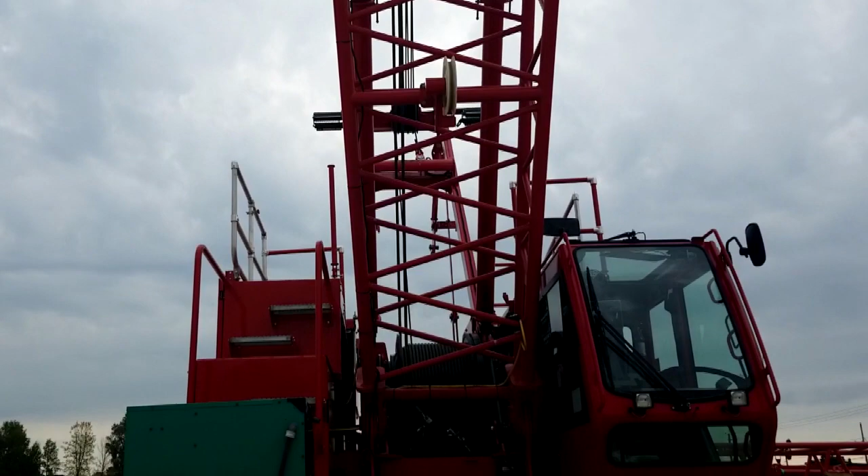To begin the inspection process of our MLC100-1, we must first reference the MLC100-1 Inspection and Maintenance Checklist, or F2317. Let's bring that up now.

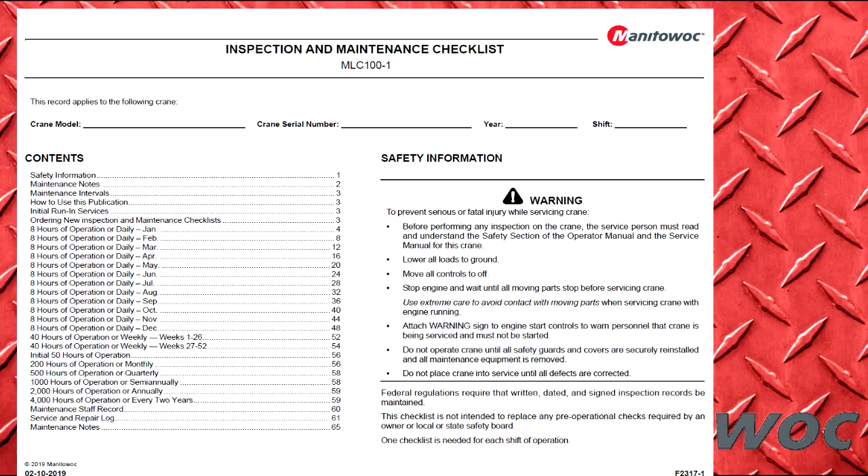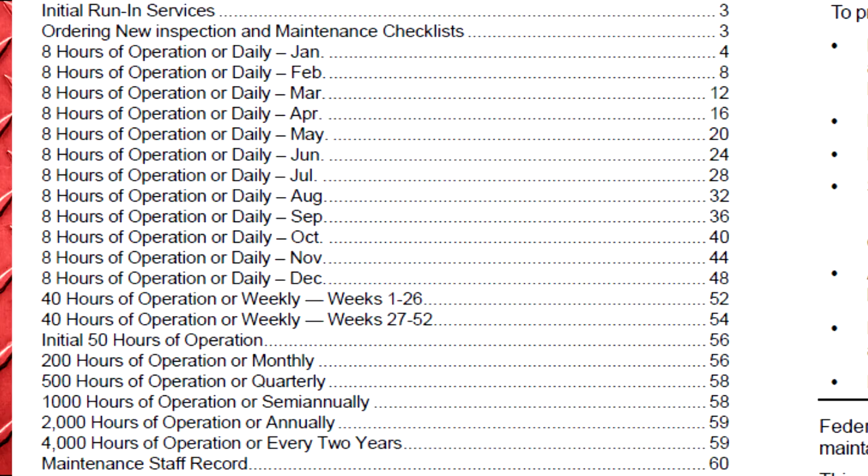This document outlines all of the expected maintenance procedures that must be completed every 8 hours or daily, 40 hours or weekly, after the initial 50 hours, 200 hours or monthly, 500 hours or quarterly, 1,000 hours or semi-annually, 2,000 hours or annually, and finally 4,000 hours or every 2 years.

This checklist is designed to be filled out by job site personnel working with the MLC100-1 so proper maintenance schedules can be tracked. But to begin the maintenance process, let us look further in the document to the sections detailing the 8 hours or daily maintenance steps, for this example.

We will assume we are doing a daily inspection on the MLC100-1 in May. Therefore, we must find the 8 hours inspection checklist for the month of May.

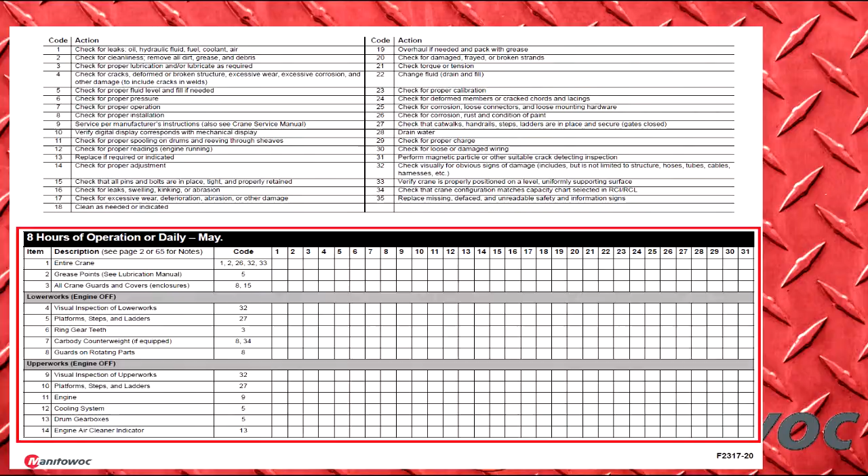While looking at the section detailing maintenance requirements, we find two tables: one of maintenance codes and the other for monthly tracking or scheduling. Each maintenance item is numbered in the leftmost column with a description of the item to be maintained or inspected, and maintenance-specific notes or codes are shown in the following columns. The remainder of the table is used to check off completion of the inspection every day for that specified month.

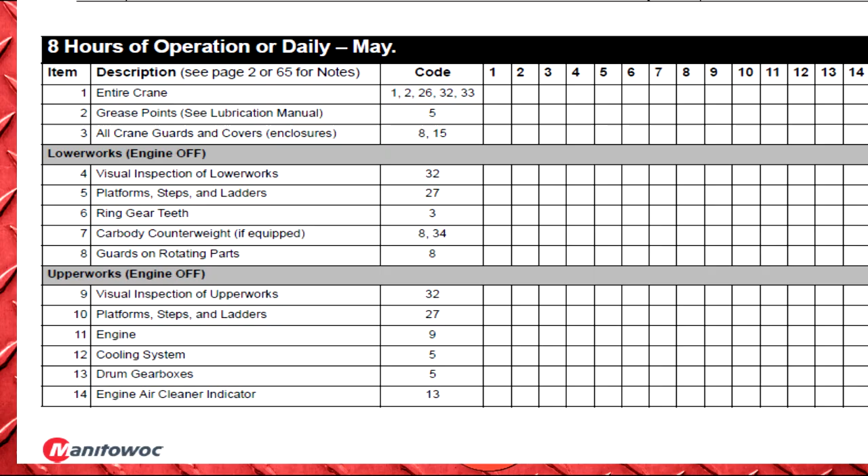To go through a few examples of using the inspection guide, we will look to the first item. It states that the entire crane must be inspected, and looking at the table above, it notes that codes 1, 2, 26, 32, and 33 must be checked.

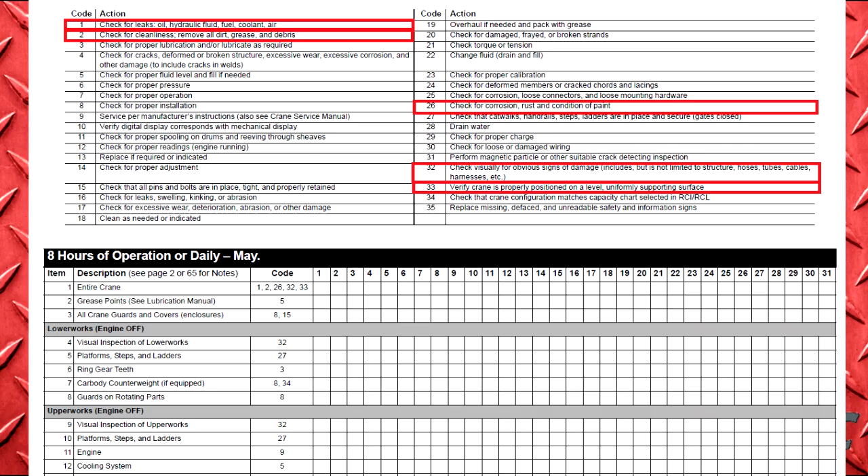That means we must check for oil, hydraulic fluid, fuel, coolant, or air leaks; remove all dirt, grease, and debris; check for corrosion, rust, or poor paint conditions; and inspect for obvious signs of damage to all items, including but not limited to structural components, hoses, tubes, cables, or electrical harnesses.

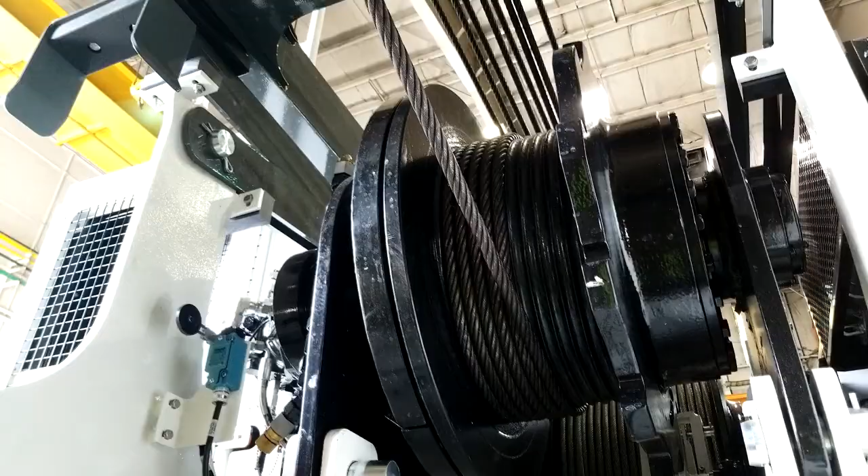Verify correct crane position, level, and supporting surfaces. Make sure to pay careful attention to any rust, corrosion, or damage on any wire or rope equipped on the machine. As shown under item 50, codes 3, 11, and 20 are present for inspection of the machine's wire rope. Therefore, cable must be checked for proper lubrication, proper spooling and reeving through sheaves, and damaged frays or broken strands should be addressed.

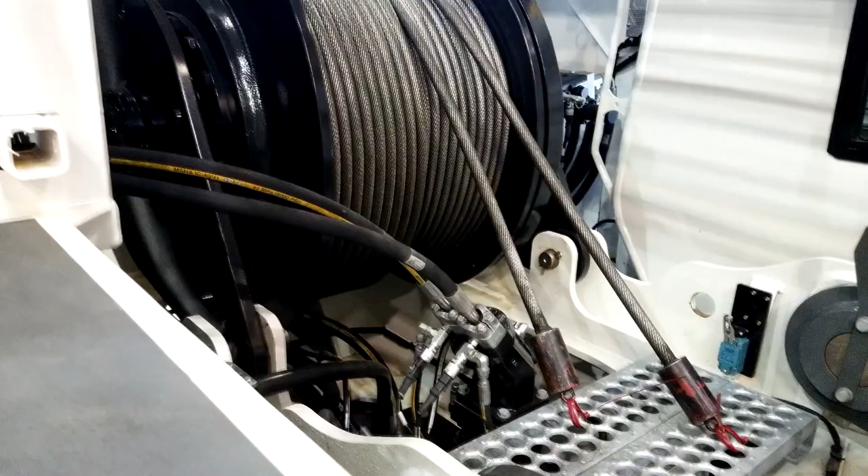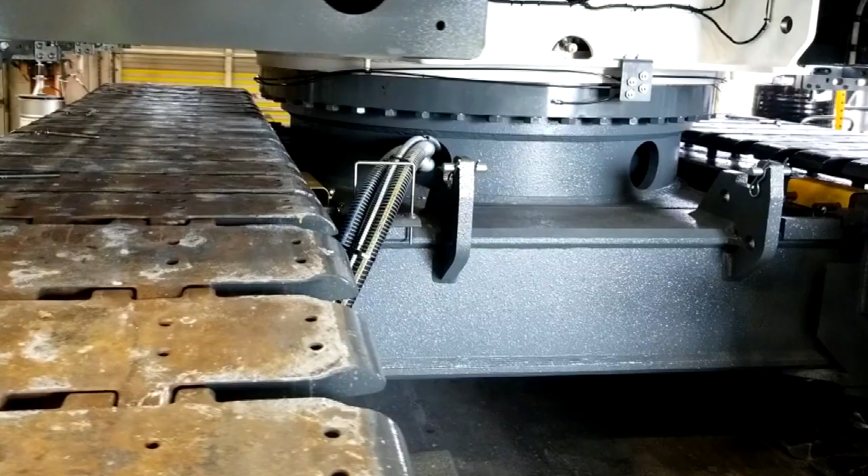Also pay attention to exposed hydraulic hoses, tubes, cables, electrical harnesses, or other structural components on the lower works, such as those used for the travel system. With these being exposed to the elements and or near to the ground, they must be checked daily for any signs of wear or unintended damage, as listed under item 4, code 32.

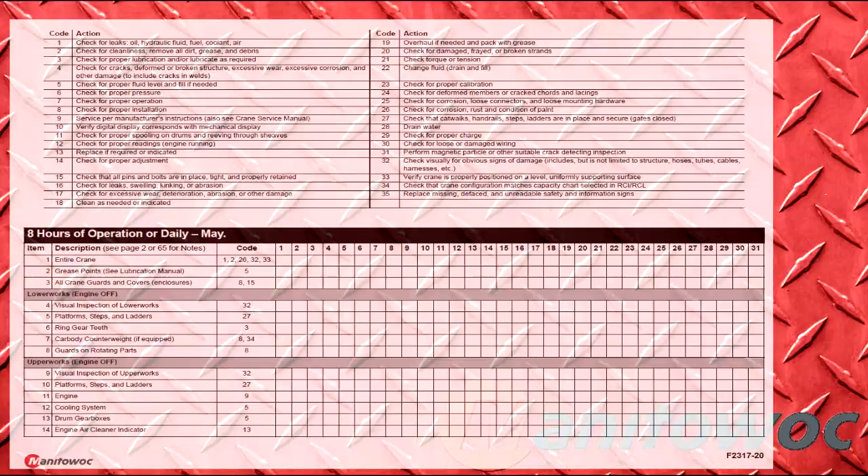Let us now look at a few additional inspection points. Looking lower on our checklist, we can see several items on our upper works must be inspected with the engine off. Firstly, item 10 notes that platforms, steps, and ladders must be checked for damage and ensure they are secure.

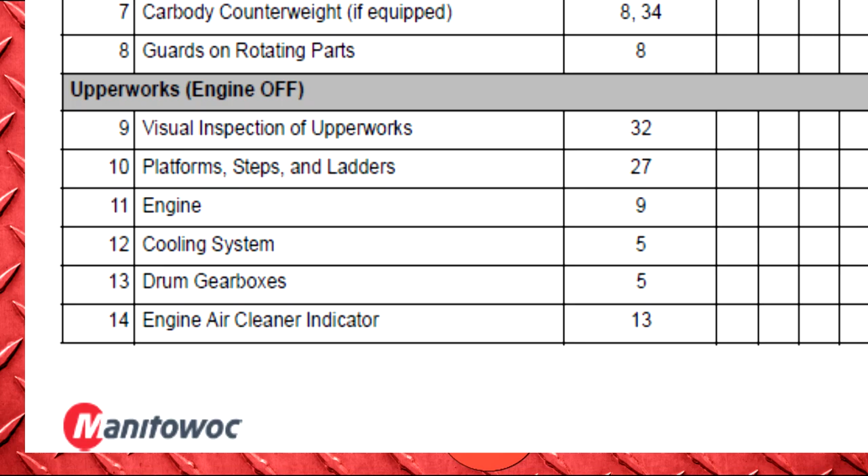This includes verifying all retaining pins are properly installed and all catwalks, railings, and ladders are not structurally damaged and have been fully deployed prior to operation of the MLC100-1.

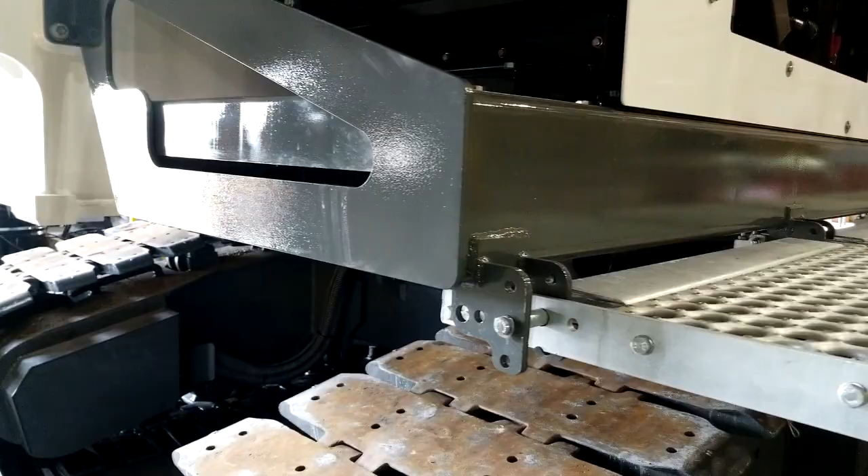Note: during crane assembly, deploy and secure rotating bed catwalks as needed to allow for safe ascending and descending of the machine. It will be easier to access the operator's cab if you leave the sliding platform stored under the front of the cab until after the crane is traveled off the trailer.

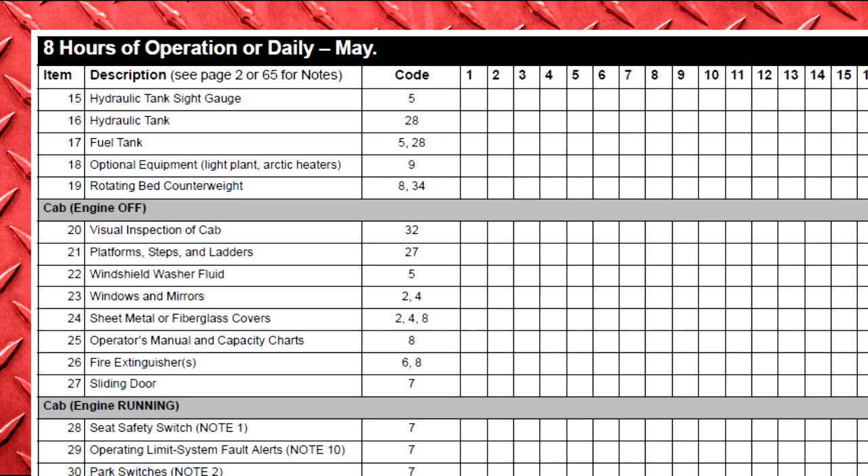Item 15 notes that the hydraulic sight gauge must be checked to ensure hydraulic oil is at an adequate level. Note: for more in-depth maintenance procedures and locations of all items referenced, the lubrication guide for the MLC100-1, or Folio 2314, is a great tool.

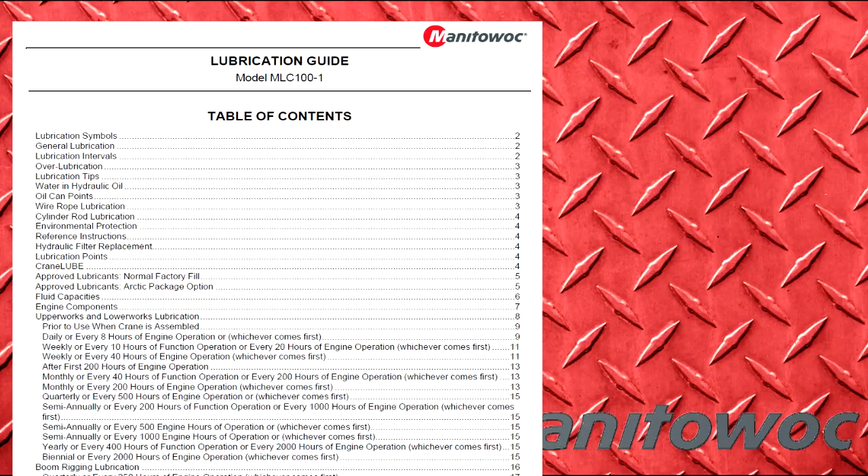If we look to the daily, or every 8 hours of engine operation, inspection points, we once again can find the points to check hydraulic oil level. This point is labeled as D4.

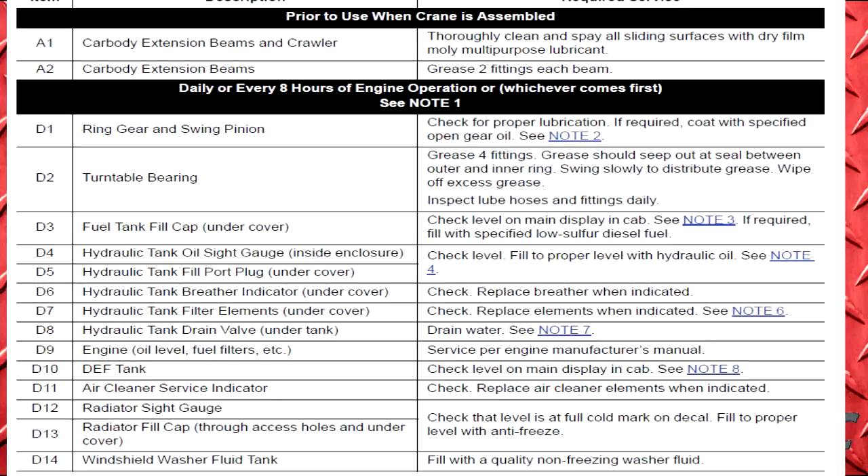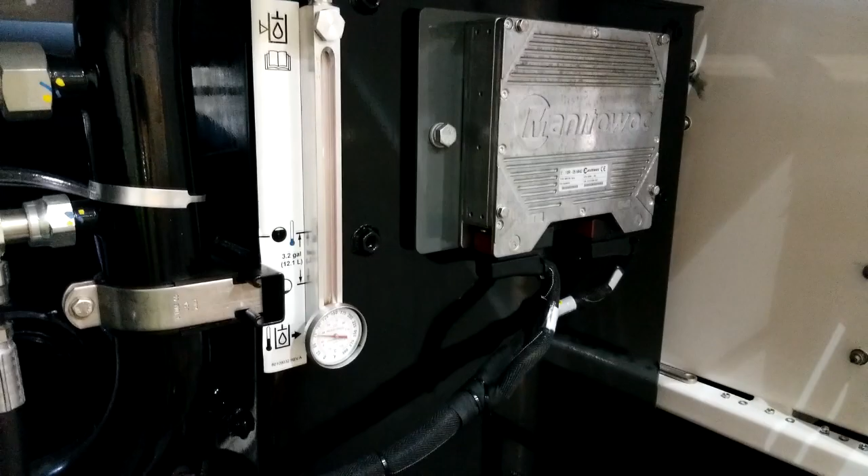With the hydraulic tank maintenance requirements found, it is also good to note that the engine must be properly maintained as well. If we look on our checklist, it lists that the engine must be serviced per the manufacturer's requirements. With the Cummins QSB 6.7 package, the lubrication guide for the MLC100-1 does denote the locations of all major maintenance points within the engine bay.

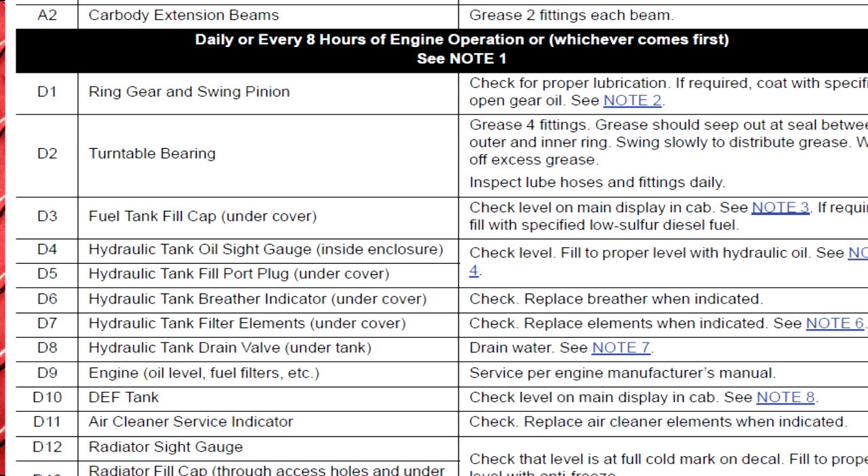As we can see, lubrication point D9 designates the engine, and D9 is located at the right rear side of the rotating bed within the side enclosures.

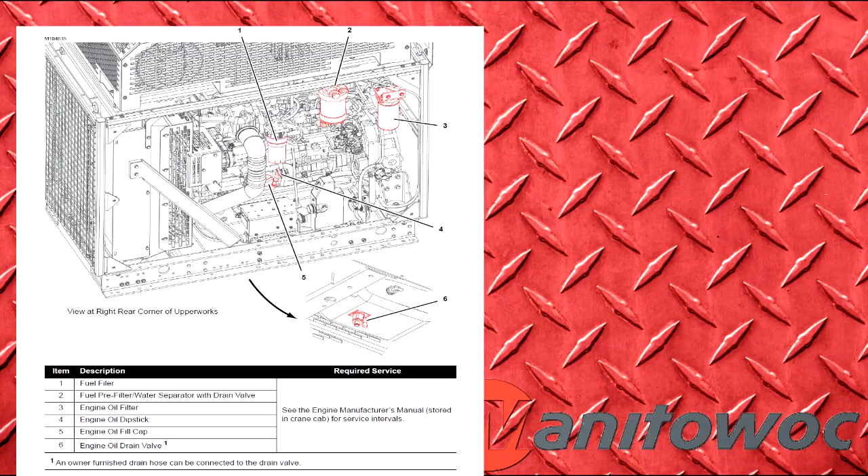Within this section, we will find many major engine components, such as the fuel filter, fuel pre-filter, engine oil filter, and the engine oil dipstick, among many more items.

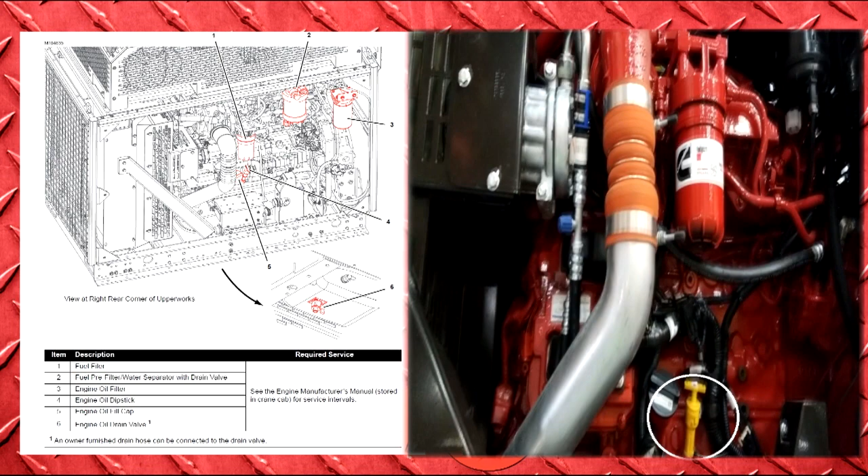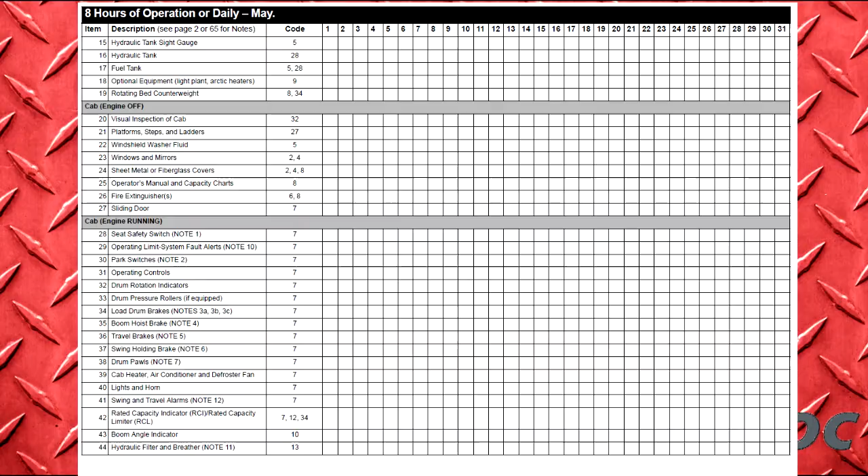The combination of both the maintenance checklist and the lubrication guide should be used to complete all remaining maintenance points for both the cab with the engine off, as well as the cab with the engine running. All points skipped in this demonstration should also be completed as shown in either of the two manuals. Ensure that proper maintenance and lubrication procedures are completed fully at the predetermined intervals listed in both documents. This will allow for more efficient and reliable operation of your MLC100-1 in the future.